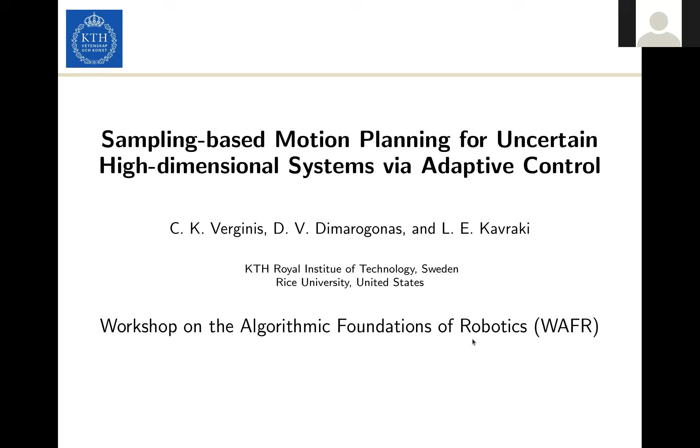So this work deals with the motion planning problem for complicated structures, which essentially is to find a way to automatically navigate a system to some desired goal while avoiding obstacles. So, for instance, here in the picture on the right, you see a UR5 manipulator which aims to navigate to the four targets shown here in cubes while avoiding obstacles, which are these rectangular shapes in the workspace.

Motion planning has been studied a lot for many years, and there are numerous applications. And maybe the most standard way of doing motion planning for such systems is sampling-based motion planning, which essentially consists of sampling random points in the free space of the robot and trying to connect these points among each other and to the goal in order to create a geometric path for the robot to follow safely to the goal.

And it turns out this is very efficient and it scales very well as the number of degrees of freedom increase. So here, for the sequential tasks of navigating to the four targets, we see the results of a geometric standard RRT algorithm. And we see here the number of nodes for the four sequential tasks and the time taken. And we see actually that in most cases, the algorithm is able to find a path in less than 1 second for the six joints of the robot.

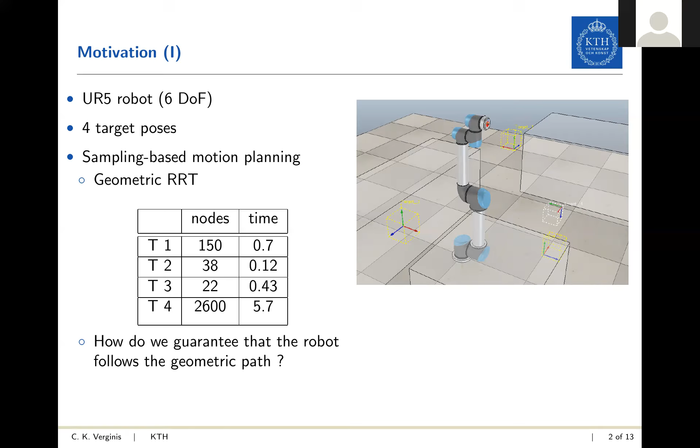One issue, however, is that this is a geometric path, and how can we actually guarantee that the robot will follow safely such a path? And this because of the fact that the robot actually evolves subject to second order dynamics shown here. So q is the joint vector of the robot consisting of the six joint variables. q dot is the velocity, and then we have standard inertia, M, Coriolis, C, and gravity terms, G. And u is the control input, control action of the robot.

So in order to take into account such dynamics, there have been kinodynamic algorithms developed, which now instead of just sampling joint space points, they also sample velocity points. So considering the state space of the system, so joints and velocities, and actually by randomly selecting control inputs, they simulate for the system such as these dynamics hold in order to see where the system ends up. And in that way, these algorithms create, again, a sequence of points to be followed in the free space, consisting of joints and velocities.

However, such algorithms are actually sometimes very inefficient and they take a lot of time due to the randomized actions and due to the possibly complicated dynamics of the system. So in this case, for just two joints, the first two joints of the robot, the kinodynamic RRT took almost 1,000 seconds to find a feasible path.

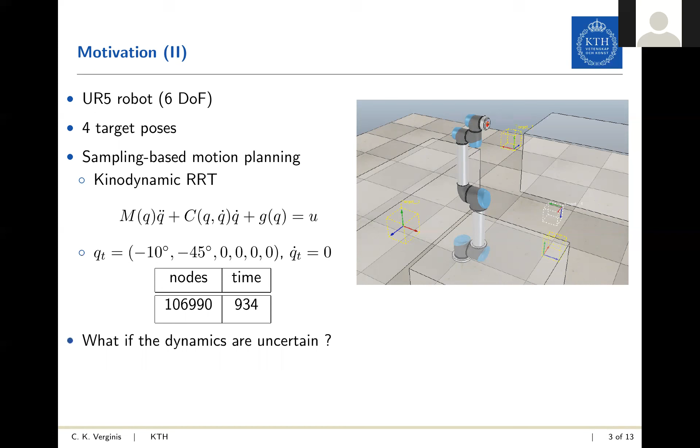On top of that, what if the dynamics of the robot are uncertain? So what if these terms here are not known to the algorithm or to the decision maker? The forward simulation of the dynamics can actually fail, or it can produce false trajectories. So motivated by this, we consider in this paper the motion planning problem under Lagrangian robot dynamics shown here, where we have also included the disturbance term. These dynamics we consider uncertain or unknown to the algorithm.

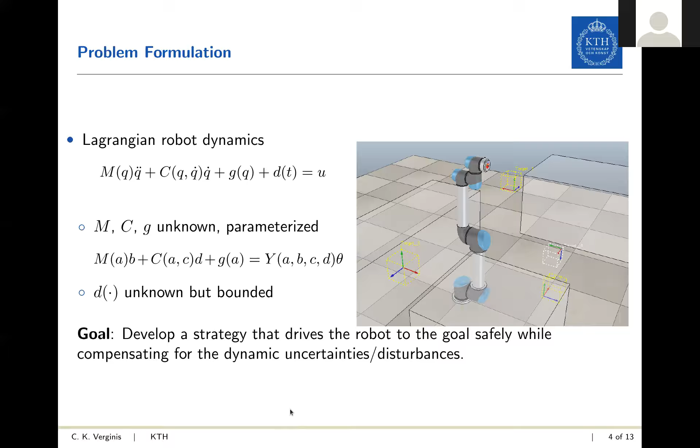So M, C, and G are unknown, but we assume they can be parameterized like this. So they can be written as the product of a matrix Y, which is assumed to be known, times a vector theta here, which is unknown. So this theta usually consists of unknown constant parameters in the dynamics, such as mass or moment of inertia. And we also assume that the disturbance here, d, is completely unknown, but uniformly bounded. And the goal here is to develop a strategy that takes the robot to the goal safely while avoiding the obstacles and at the same time compensating for the uncertainties in dynamics and the unknown disturbances.

So our proposed methodology consists actually of two layers. The first layer is a control design, a traditional control design algorithm. So what we do here is we appropriately design the control input U in order to track a given reference trajectory QD. And we aim to do that within given bounds.

So shown in the picture here, given these upper and lower bounds, what we want to do is actually to force the system state Q to track the desired trajectory, the reference trajectory QD within these bounds. So here you can see that the error or difference stays in this funnel here formed by the upper and lower bound. Next, we aim to use these bounds in order to create a new extended free space in order to be used in the motion planning algorithm.

So here, actually, instead of trying to sample points in the free space of the robot, we sample in the extended free space of the robot, which takes into account these bounds. So essentially, the output path of the randomized sample-based motion planning needs to be sufficiently far from the obstacles based on the bounds. So here is a nice example in the picture.

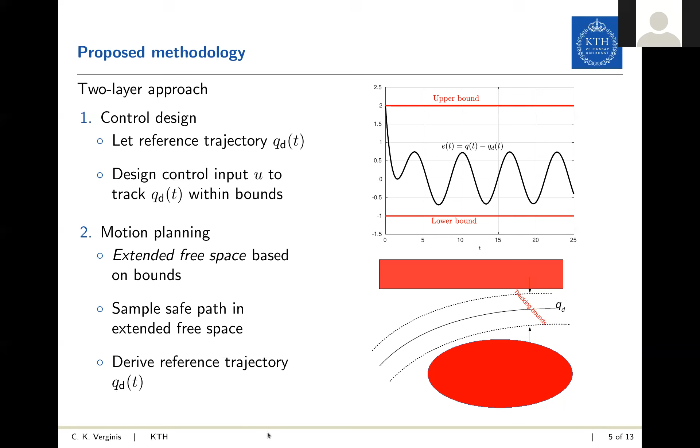And once we do that, we endow time to this path, time constraints to this path to form a reference trajectory QD, and then we use the control design approach to actually track this trajectory. So the control design layer consists of a standard adaptive backstepping methodology.

So we actually first separate the joint and reference trajectories to translational and rotational parts because that's what systems like robotic manipulators consist of. Then we define these errors of the state with respect to desired trajectories, which we want to converge to zero. We want to force these errors to zero. And the idea here is to design a reference velocity, here denoted by alpha, which we would like the robot to have. And this is actually a very standard proportional feedback controller.

So it consists of the velocity of the desired trajectory minus a gain, a positive matrix gain times this error. And this is for the translational part. The rotational part is similar. It's just that we use these cosines and sines because we take into account the fact that rotational joints evolve in manifolds. But these two expressions are equivalent.

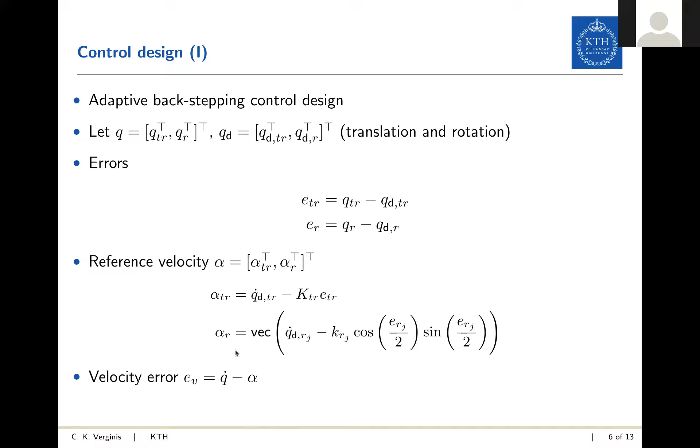So once we have defined these reference velocities, we formulate the respective error, which is the actual velocity of the robot minus the reference velocity. And since we would like the robot to have the reference velocity as velocity, we want this error to also converge to zero. The second step consists of the actual design of the control input.

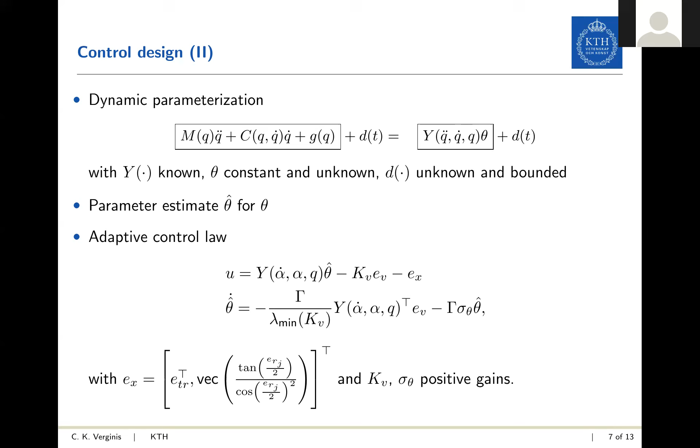And we use again constant gains like gamma and sigma theta, positive gains, and lambda min here denotes the minimum eigenvalue from this matrix. So by using this adaptive control law, we can actually show that the state evolves close to the desired reference trajectory QD, in the sense that the error is bounded by some bound delta.

And this bound actually depends on the bound of the unknown uncertainty and also on the bounds of the dynamic terms. And we can use this delta, as described before, to form the extended free space.

So the extended free space is essentially the space where the inflated volume of the robot does not meet the obstacles, and this inflated volume of the robot is essentially the original volume inflated by these delta bounds.

So here on the right, we have an example. So in the original RRT, this is the path we would produce, and if the robot manages to follow this path, of course, it is safe. However, in our new algorithm, we cannot exactly track the given path or the given trajectory, so we need to create the extended free space defined by delta here, which essentially says that the robot needs to be safe even if it tracks the path within this funnel, given these bounds formed by the dashed lines.

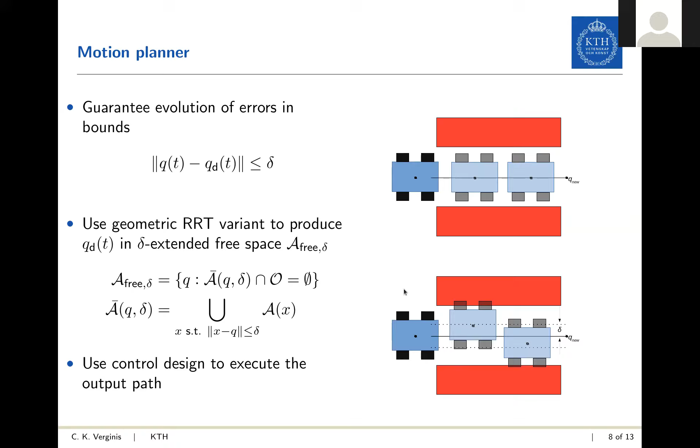So we verified the results with VREP computer simulation. In the VREP environment, we used the standard example of UR5 consisting of 6 joints, which we assume to be rotational joints. And the robot, as stated before, needs to visit sequentially the 4 targets: target 1, target 2, target 3, target 4. We assumed that the extended free space was formed with 0.1 radians as a final constraint.

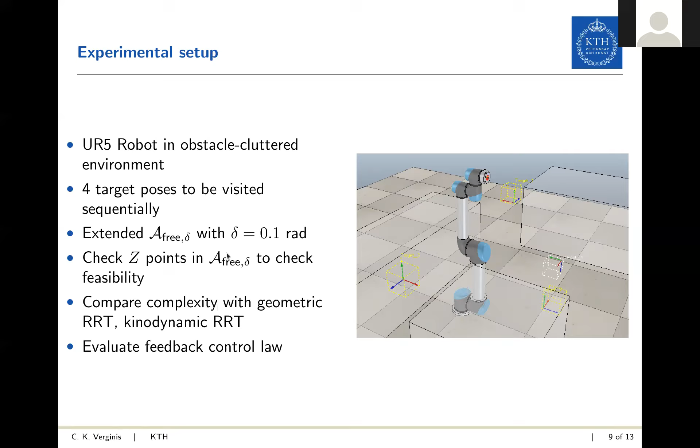And since we cannot form a proper distance metric for the whole manipulator, in order to check the feasibility of the extended free space, we simply check a number of points, denoted by Z, to see if the extended space is actually safe. And what we do essentially is compare the complexity of our algorithm with a standard geometric RRT and the kinodynamic RRT, and we evaluate the designed feedback control law.

So these are the results of our algorithm. In the middle and right tables, we see the results where we use 10 points and 50 points in the extended space to evaluate whether it's collision free or not. And we can see that the time taken is usually low, definitely compared to the kinodynamic RRT, which actually involves the dynamics. In our algorithm, we see that the number of nodes is similar to the geometric RRT.

The time taken is greater, of course, because we look in the extended free space. We sample more points, so in this case 10, and in this case 50. Of course, in this case we take more time. However, we stress that the proposed motion planning in the extended free space is completely decoupled from the dynamics. The dynamics are taken into account by the proposed control design.

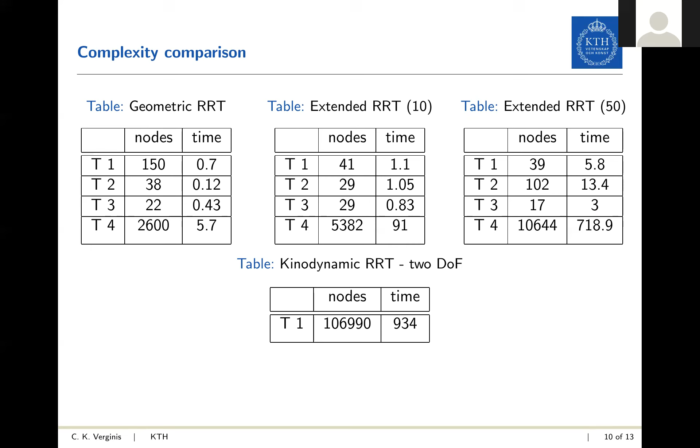So in this way, we can do motion planning very efficiently in the geometric space while taking into account implicitly the dynamics through the control design. And this is what makes this algorithm very efficient. And this is a video of the manipulator actually navigating to the 4 points safely in the VREP environment.

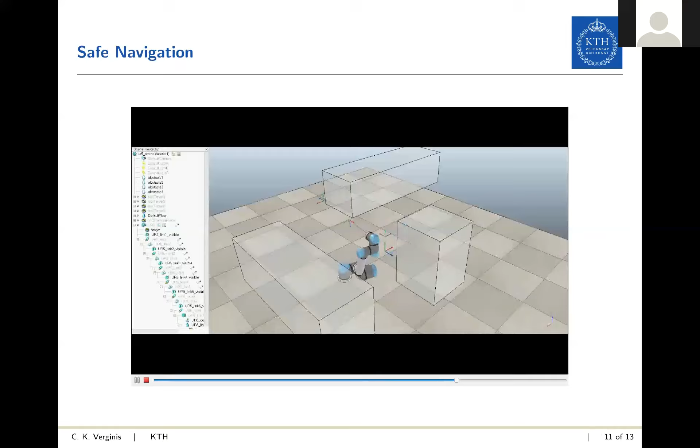And this is actually the evaluation of the feedback control law. We show that the application of this control law keeps the system in the desired funnel, which of course means that the system will be safe.

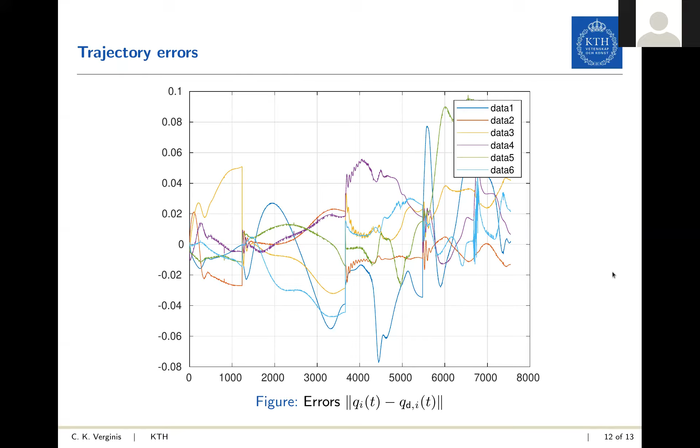So to conclude, this paper considered the motion planning problem of complex robotic structures like robotic manipulators. We integrated sampling-based motion planning techniques with adaptive control. We first designed a traditional adaptive backstepping controller that takes into account and compensates for the uncertain dynamics. And then we used that in the motion planning algorithm to develop an efficient geometric way of creating a safe path to the goal, without involving the dynamics, which are implicitly taken into account by the control design.

So possible extensions are actual physical experiments on this framework and extensions to non-holonomic or underactuated systems such as underwater manipulator systems. And another extension would be to use a priori or user-defined bounds for the extended free space, not based on the bounds of the uncertainties or the disturbances.